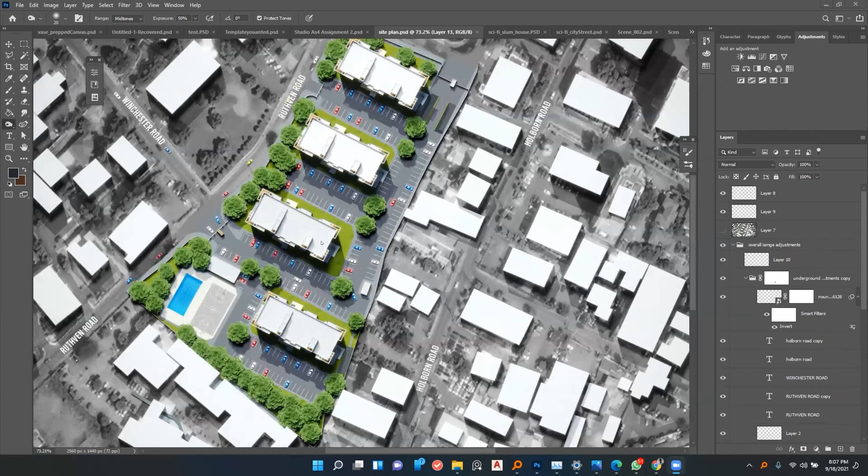From there, everything is rendered and layered on top of one another, so to speak. The main image in color is where I apply all the trees and textures. I'm the type of guy where sometimes I prefer to do certain things in 3D. So for the grass texture, what I could have done is use what is called a mask, which lets me select the areas around the structures and then apply a grass texture.

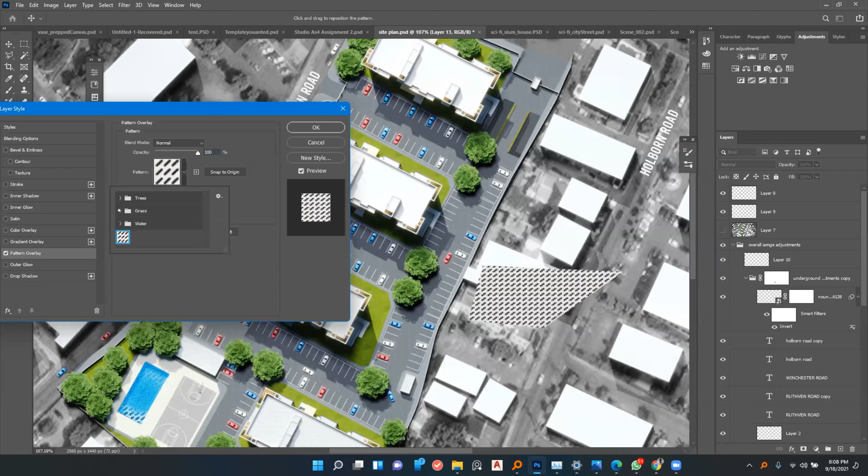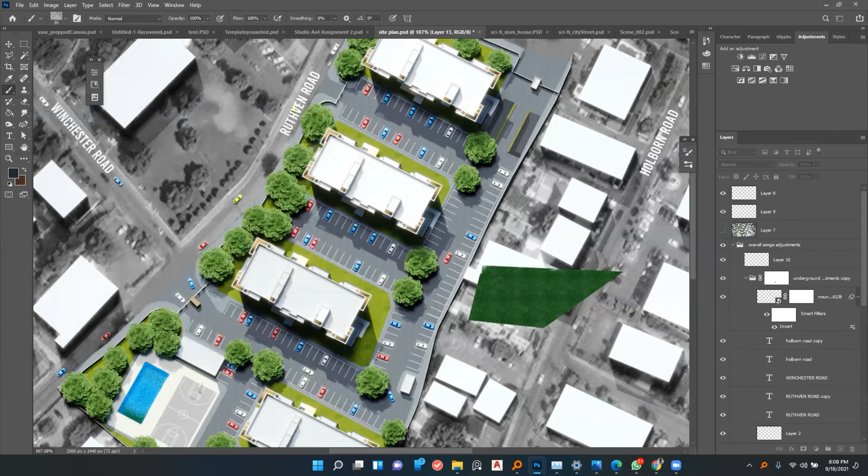To give you a general idea of what that is, I'll give a quick demonstration. This is pretty much just a selection that's then painted in, and then I can apply an effect such as a pattern overlay. I can make custom patterns or use pre-existing ones, and from there scale it similarly to AutoCAD. I can then apply this all over my scene in areas I've selected. It helps save time rather than painting in the grass or erasing around it—you can just have the general shapes drawn out already.

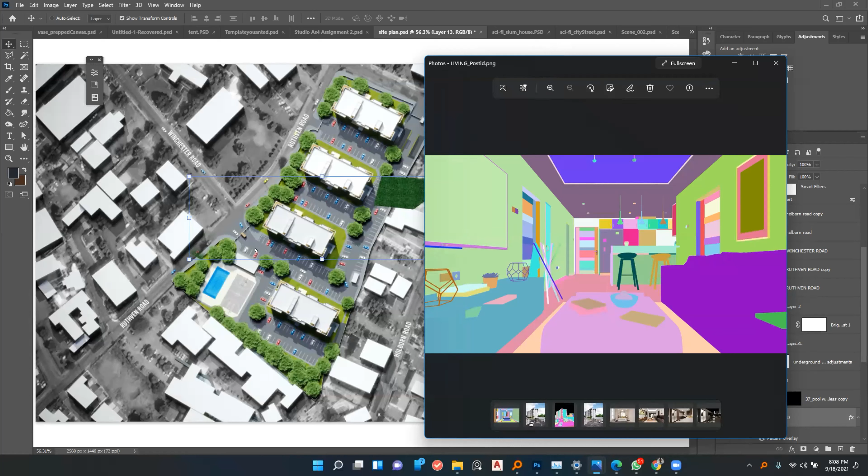Or if you're capable of doing it in the render program, you can render what is called a material ID or material mask. This is an image which is an example of one. What it does is allow you to faster select certain areas of your 3D rendering, which makes the photoshopping happen a little bit easier.

But for this, it's a very simple thing—the general outline exterior is pretty much just placed in black and white, like a Google Map image. I added text here and there, and then it's just general editing from the color balances to the brightness to the hue and saturation—all found under adjustments. So, for example, with brightness and contrast, I want to boost it, make it a little brighter, and maybe more contrasty to punch in some shadows.

The main idea behind this is to get an image that is clear, so people can have a general understanding of what you're trying to convey—where is your structure, what is around it—and you place a lot of importance on just the general site.

Moving on to another example.

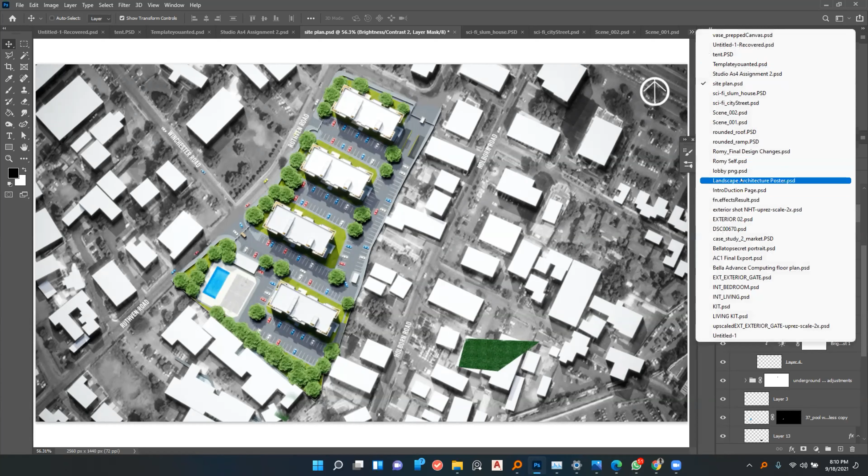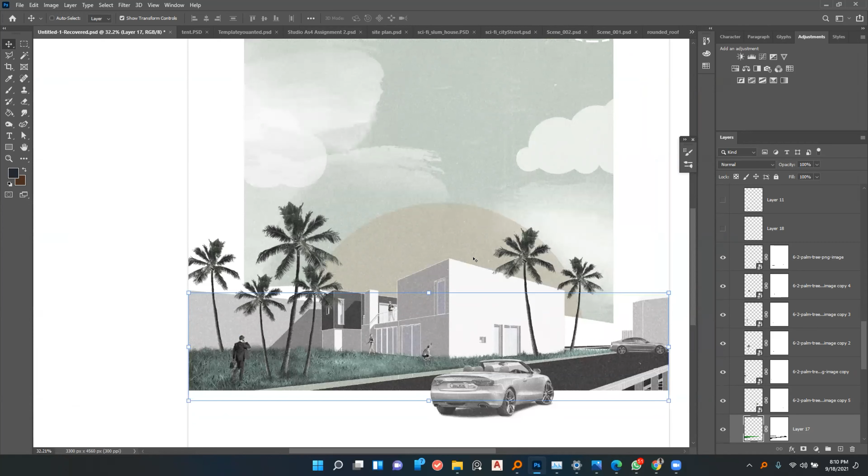The thing about Photoshop is that it can not only do more realistic renditions for architectural visualization, it can also do collages. It's very varied—it can be from hyper-realistic renditions to more collage-based ones, where you take elements from different areas across Google and compile them into a collage to kind of speak or say something about your work.

Let's say, for example, in this one I had just a SketchUp import of this white model. It wasn't really anything too fancy—it was just really and truly a SketchUp import.

And then from there, I overlaid a noise filter and a paper texture. I also imported some line work from SketchUp and inverted those to white to help punch things out a little bit more. Most of these little smudges and marks that you see here are pretty much just a brush that's been applied all over the scene to add a little bit more grit and texture, so it's a little more visually pleasing.

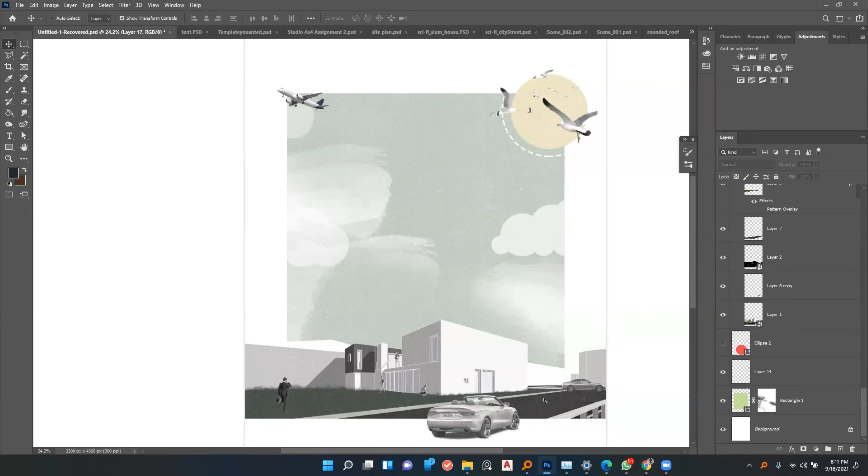From there, subtle things here and there are added in, like I darken the road—I use the PNG of a road and just drop it over to add a little more grit and texture. Then for the grassy areas, I started to copy in a grass image and copy that all over that little patch here.

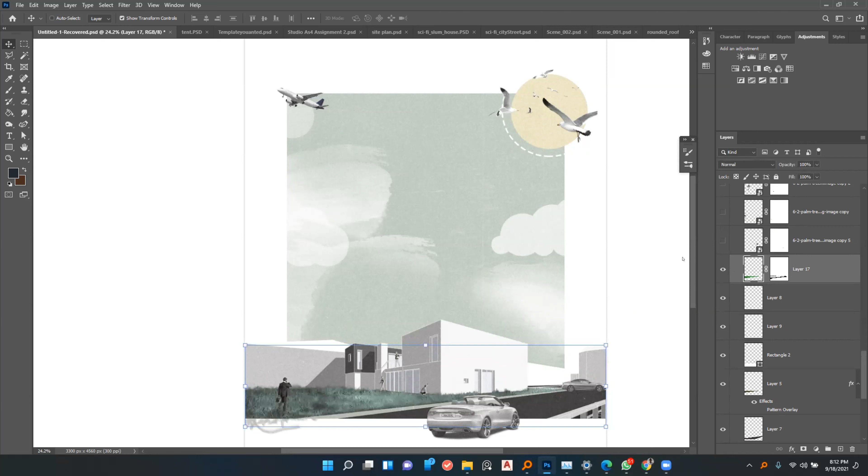And then I use the brush to help fill it out and let it feel a bit more luscious. Then I added trees here and there, and darkened the base of the roots to add that extra shadow, and added a little bit of what I call ambient occlusion, which adds some realism to the scene itself.

From there, it's really just the use of masks here and there to darken certain things and add certain things. I can also use a black soft round brush to add dark areas into the scene, which helps create shadows or make shadows darker, punching things out a bit more. You can either create them on a separate layer and turn down the opacity, or play around with the opacity of the brush itself, and also a little bit with the flow.

Moving into something else that's a little bit more realistic per se, this is another example, an application in a section actually. For this one, it's pretty much more of the same, where it's just adding entourage to give the image human scale and let it feel a little bit lived in, adding context on the exterior, a little pop of color to signify that this doesn't exist in a white void but there is a space behind it. Adding shadows, and a little bit of this bloom effect to let it pop a bit more and let the colors be a little more vibrant, so to speak.

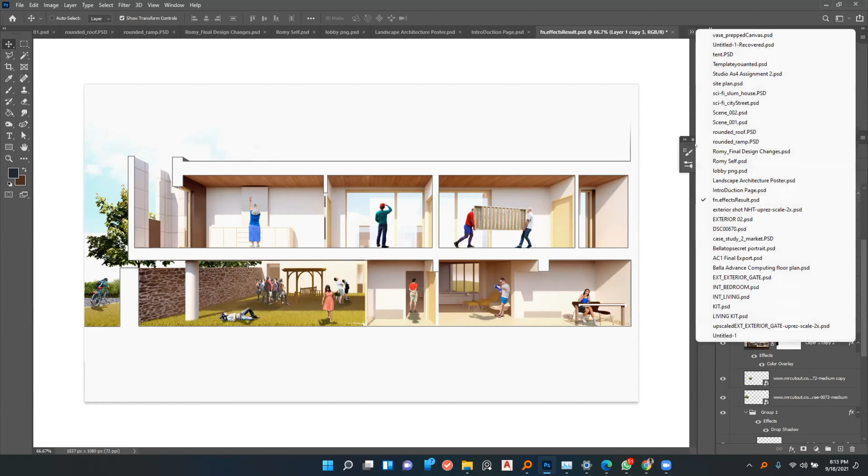I guess another example would be... not this one. Sorry guys, I have quite a few projects open. So yeah, this one is a little bit more heavily rendered in 3D.

But the benefit of this is, well, what I normally do with Photoshop is I always touch up the images no matter what. It's always important that while you go through the processes in 3D to give your images a specific look even before they get to Photoshop, sometimes there are certain elements the program might not render out properly—whether the image is a bit noisy, certain textures didn't come out exactly the way you want, there's a lot of tiling, or you needed entourage, but adding 3D people to the scene would have taken longer to render.

In this instance, however, it's just the image, and what I did to it is mainly just a few little things to pop the image and help you focus on it a little bit more. So what do I mean by that?

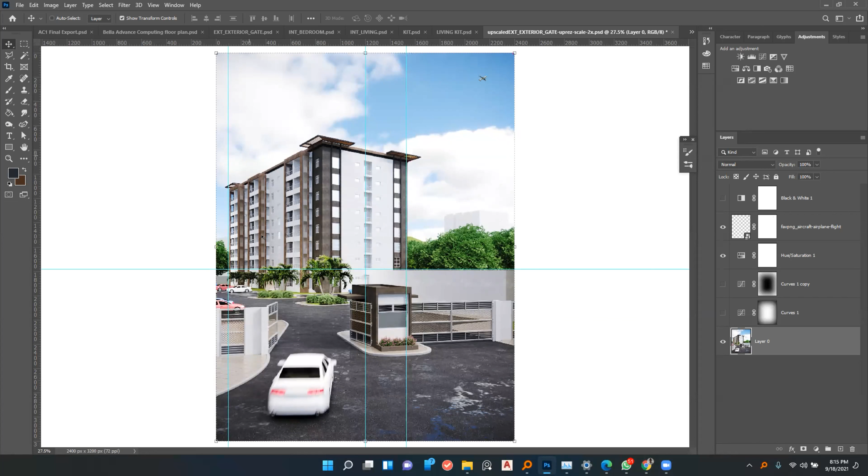Composition is very important when it comes to ArcViz. You want to know what the main target is that your audience is trying to focus on. So I'm using guides right now to give you a general idea of what I was trying to keep in view of the viewer. The main object with the most weight to the left is the building itself. But also, not only do you need something visually heavy, you need a little bit of breathing room around the image. So within the edits, even though they're subtle, I try to add things here and there to help pop that out a bit more.

So over here at this layer, what I've done is pretty much just an adjustment layer, which is a curve. What the curve does is push your highlights—it can push your highlights to be a little brighter, or compress the shadows and let them be a little darker. So in an extreme case like this, you can see the further down I push it, the darker the image gets, and the higher I push it, the lighter the image gets.

But sometimes I don't necessarily want it to affect the image overall, so what I do is add a mask to help keep certain areas in focus. For example, I highlight the specific area, select it, feather the area, and this allows me to pick the location of where I want to be in focus. Then I can add an adjustment layer with that mask already applied, and whatever changes I make usually applies to that area of focus. So that's actually a way you can use to help push your images or add a story to them.

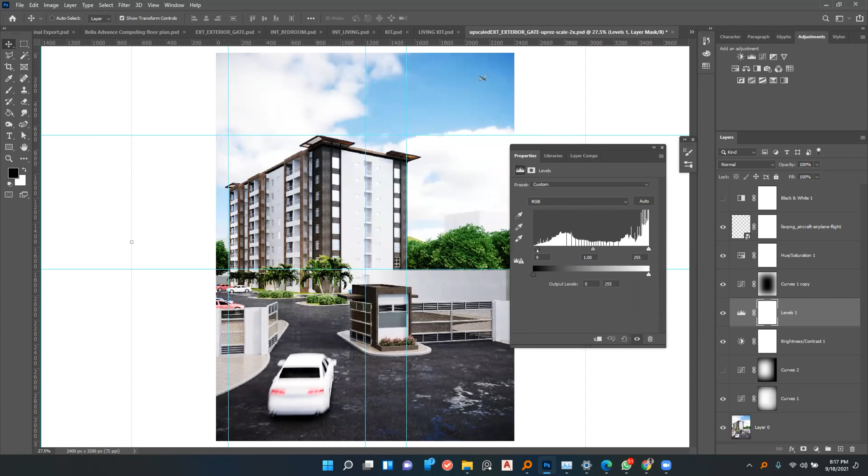Otherwise, it's subtle little changes here and there with the colors. The main things I normally do are edit the brightness and contrast. Sometimes I prefer my shadows to be a little more punchy, so I bump up the contrast, and sometimes I want the image to be a little brighter depending on how dark it came out. Levels is pretty much an adjustment that retains both the highlights and shadows, and it's used to fine tune the image until it gets to that visual perfection, so to speak.

Another example is adding entourage to your renders, which can also significantly impact them. In this instance, the render was mainly just an empty scene, but I thought, I want this to feel like it's been lived in. There were certain areas with the image that I didn't like how they came out. This is another example of the material ID masks I mentioned, which can be rendered out from most 3D render programs, allowing me to use the Magic Wand tool and go in and select certain areas.

By doing that, it allows me to edit specific masks or certain areas within the image, and either brighten or darken objects, because sometimes the render engines don't properly represent the materials the way you want, and you have to go back in and edit it until it looks visually right.

It's also very useful for adding entourage to your scene, because using it can help you cut out certain elements a little easier, since you have an actual selection you can make rather than using the polygonal lasso tool to draw in, which sometimes won't draw the exact way you want or draw straight. So sometimes you have to use the magic wand and the material ID mask to capture what you need and then erase it out of the scene.

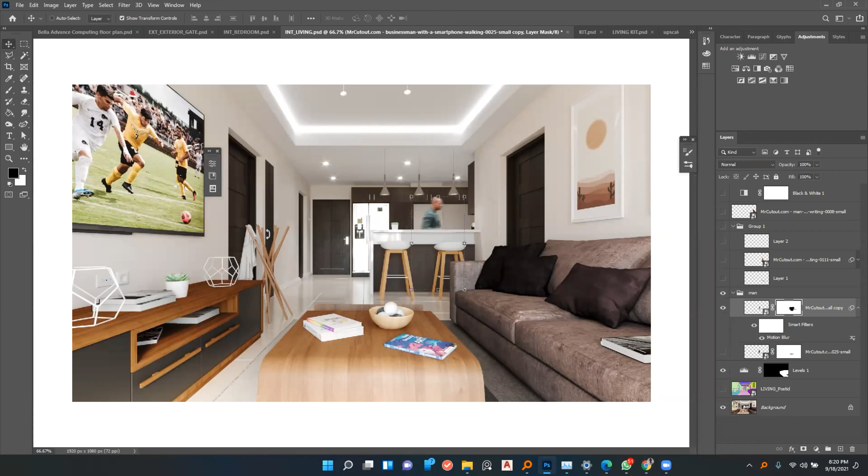Also, using masks, you can apply effects to your renders. Like this example, it was a guy who was just walking, but I wanted to convey motion in the render to capture the eye and say, hey, this is something interesting happening back there. So I added a motion blur filter. What it does is take the pixels and smear or smudge them, and you can choose the direction of the smudge to show the direction the object is moving in. This helps your renders because it adds a little movement and vibrancy.

Also, you can add in people, using a mask to help cut out certain parts of the entourage to allow them to integrate into the scenes a little better. You can also use the paintbrush tool to add highlights, or another feature I recently discovered, burn and dodge, which are tools similar to adding highlights and shadows. The burn tool darkens a particular area, and the dodge tool brightens a particular area, so it acts similarly to adjustment layers, except it's tied more to a brush, so you can choose specific areas to add highlights to and specific areas to darken a little more.

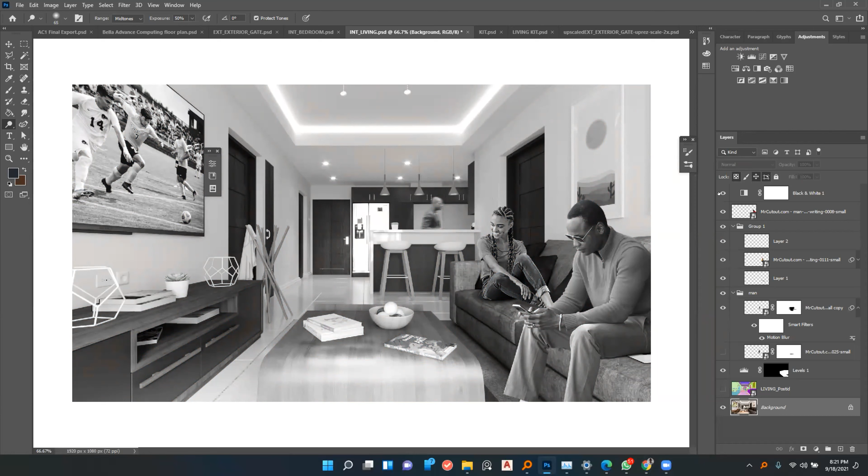Occasionally, a thing I like to do with renders to check if they feel more realistic, or if I'm unsure about certain aspects of the image, is apply a black and white filter, because if the image works in black and white, it will work in color as well. It's a thing I like to do, it works for me, and it helps me see any mistakes I might want to fix, like a little white on the cutout, and sometimes I might want to edit the material so the values appear either darker or lighter.

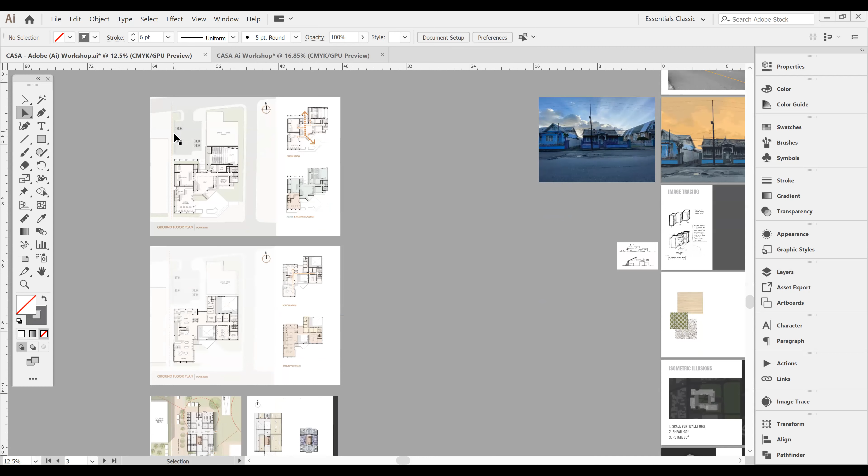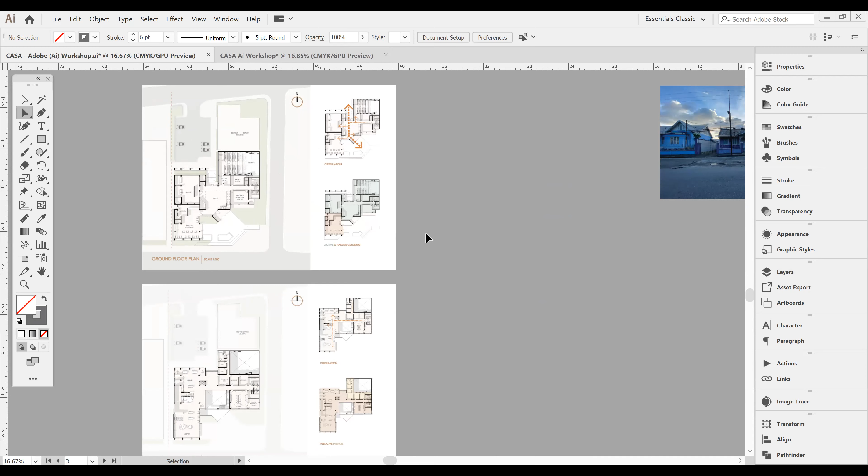Just an example, I use it with floor plans, getting them to the look that I want. Normally I export my plans from Revit, already preset with the shadows and the floor color that I would want. Once I carry it into Illustrator, I edit it further, probably put in some context, label, north arrow. And if I'm doing analytical diagrams, I'll put in those lines or blotches of color over the space and lower opacity to make it see through.

These are just some plans that were done in my 4th year. By the way, I am also a recent-ish graduate of CASA, currently also in the architecture work field and also doing my master's at the moment, also at CASA.

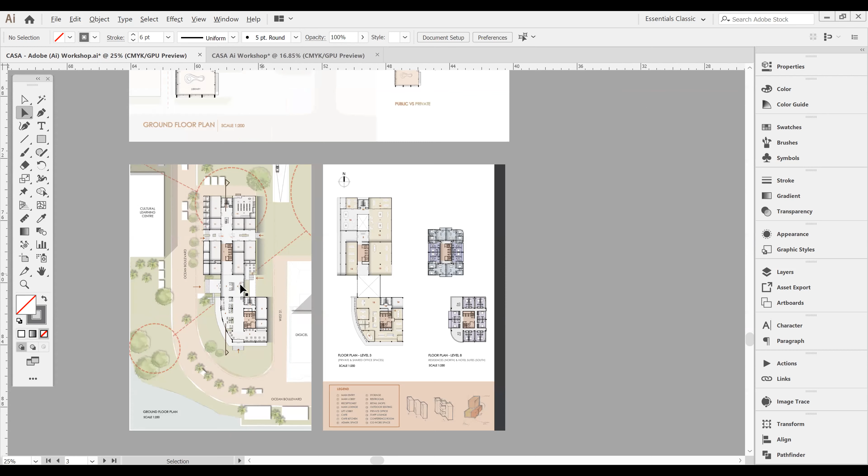So floor plans with Illustrator, I find it to be very quick and easy. Once you have that set workflow, whether you work in Revit, ArchiCAD, wherever you do your base drawings, even if it's AutoCAD, it's easy to just get those PDFs over and drop them and start working.

So Illustrator, the basics. In this image here, it was a conceptual abstract photo montage that was done for one of my master's projects. What was very significant here was the simple use of the lines.

Over here, you have your pen tool or your line segment tool. Your pen tool really works similar to any pen tool, you just draw whatever shape or line you want. If you're tracing over something or just drawing a line anywhere, you use that. So I would start here, draw a simple line, and this line already had a stroke on it, but let's say I want to make that stroke, the line thickness, greater. I just have to up the stroke here, and you can see the point changing, and lower it the same way.

Now, if I go to the stroke panel, there are more options for manipulating a line. For instance, if I want to make it a dash line, just tick the dash line option, and you can change the size of the dashes. Right now it's 12, I can change it to 6 if I want it smaller, or 20 if I want it bigger. You can also change the spacing between those lines, so it's great for getting simple diagrammatic lines.

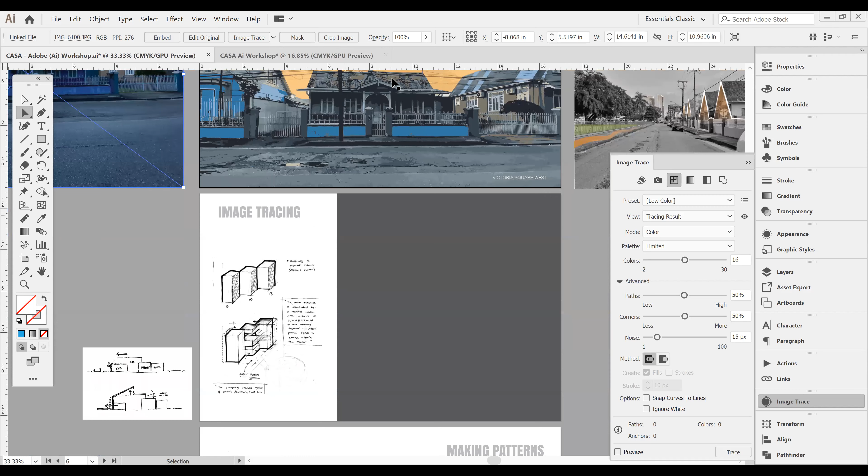Now, another really effective way of using image trace - I know sometimes we do some really cool sketches in our sketchbook, and now with all these online presentations, we're like, geez, I'm only gonna get my sketch under sheets, but it's also looking rough. I don't want to see the book in the background, I don't want to see my page.

So here I have a scan I did of one of my pages of my sketchbook, a very random sketch, just here for the example. But as you can see, it was from my book - you can see some background noise and stuff you don't really want to see when you carry the sketch to your sheet itself, like my text, my words, all that stuff. But let's say I want to have this image on my sheet.

So I'd click the image, also using the same image trace, but I want it to stay black and white, just because it's already a black and white sketch. I just want to get the lines out. So I would choose black and white, which is this one here.

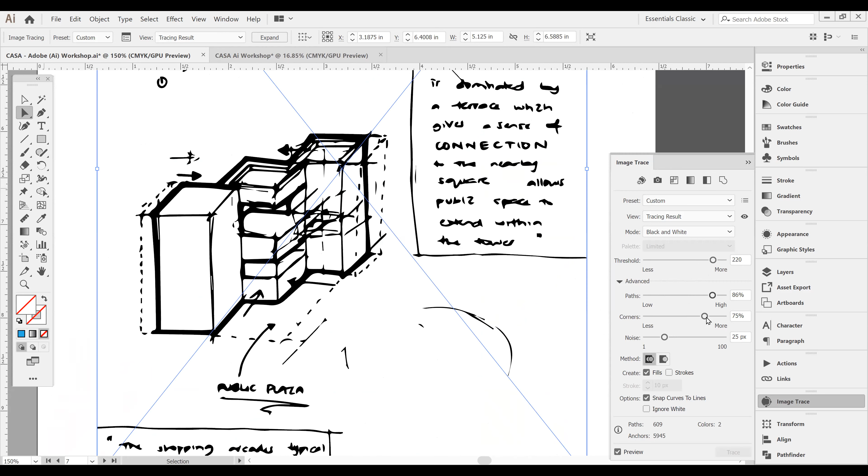And what it has done is actually turned the image into a line drawing. As you can see, it's kind of choppy looking right now, but with these tabs here, you're able to actually edit it and allow it to show more detail or less detail if you want - make it cleaner, make it more abstract if that's what you're looking to do. Basically you can edit it to get it how you want it on your sheets. So let's say this is the detail I want it to be in.

But the next thing is that my sheets are not white, my sheets are gray. How am I gonna get this? So this is how it looks right now on my gray sheet, but I don't want to be seeing that white background on my sketch - that's not cute on my gray sheet. So what am I gonna do now to get this sketch alone on my gray sheets?

Now with image trace, you can actually expand it, which allows you to see these lines and see this sketch as just paths. So you can zoom right in - that path is a clean line, no lie, no pixels, no nothing. So they have basically converted your sketch to a shape, literally. But I still have my background.

So how am I gonna get rid of that white background from my gray sheet? Well, what I would do is go into that, and you're actually able to select each shape, each color, each piece of that sheet or drawing. And because I want all the white to go away, I select one part of the white, and once I select the same appearance, it's gonna select everything that is white on the sheet. Hope I'm not going too fast.

But once I select all the white and then delete the white, all I'm left with is the content of the sheet. And now you're seeing that I have my sketch from my book, same as before, but now it's just on my gray sheet background, which I wanted.

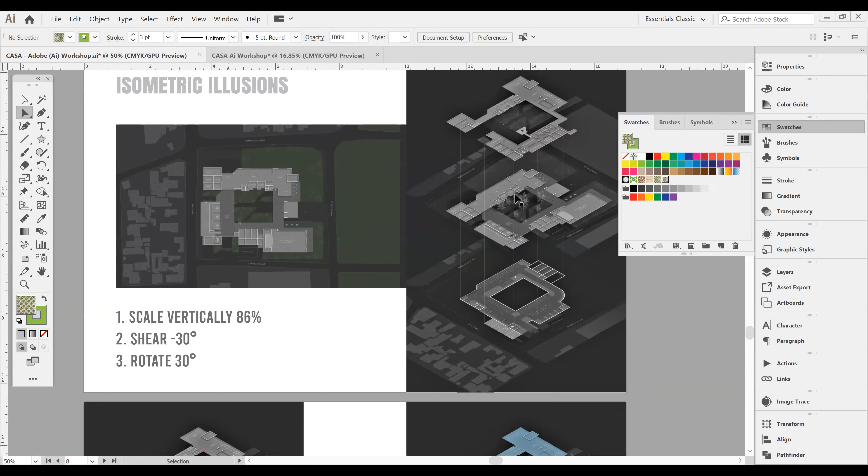So this was actually the ground floor plan before, and this is it here now, but just in black and white. So how did I get it to turn, or give the illusion of being an isometric view? Well, first, I have three steps here. You select the image that you want to create that illusion with, the plan.

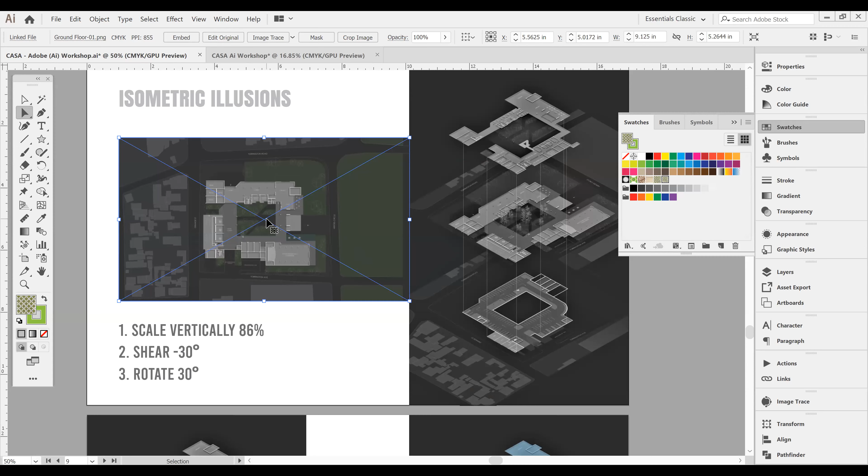Then this first step is to scale it vertically by 86%. So in Transform, you go to Scale, and because it's just the vertical plane you're scaling, you change just the vertical to - oops, I had this on 50 from the last thing, let me change it to 100 first. Right, so you change the vertical to 86.

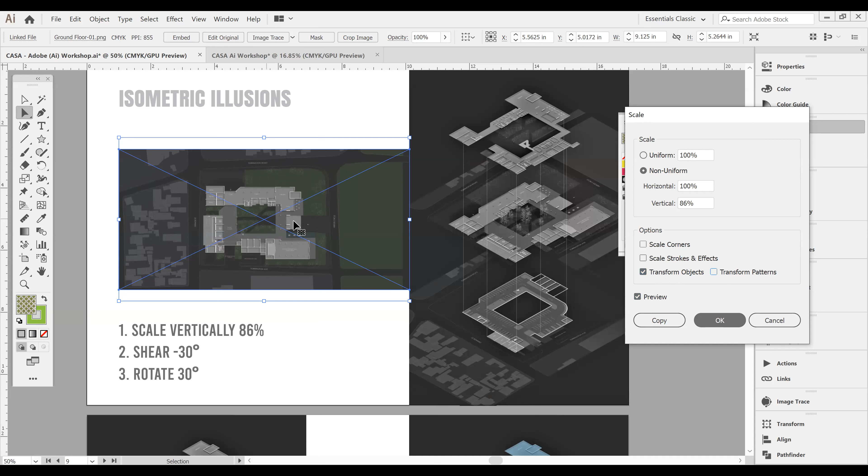And it's actually previewed, so you can see that it happened already. Oh, sorry, I didn't have Objects checked - I checked it off last time. Make sure you have Objects checked, right. Okay, so now you can see the image looks kind of skewed, kind of squished, weird looking.

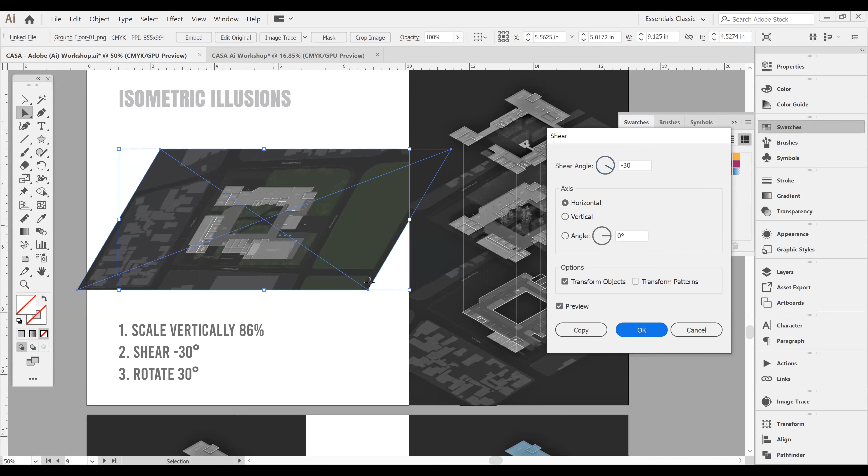Now the next step is to Transform again, go to Shear. Because of the orientation I wanted, I would do it at negative 30 degrees - but if I wanted it to turn the other way, it would be positive 30 degrees. So it's on positive 30 now, so I'm going to type negative 30. Right, so we can see it's doing something. Still looks weird, but just trust the process, y'all. So the last step is to rotate it by 30 degrees.

It's on negative 30 now, so I'm going to change that to 30. And just like that, it's now an isometric looking floor plan.

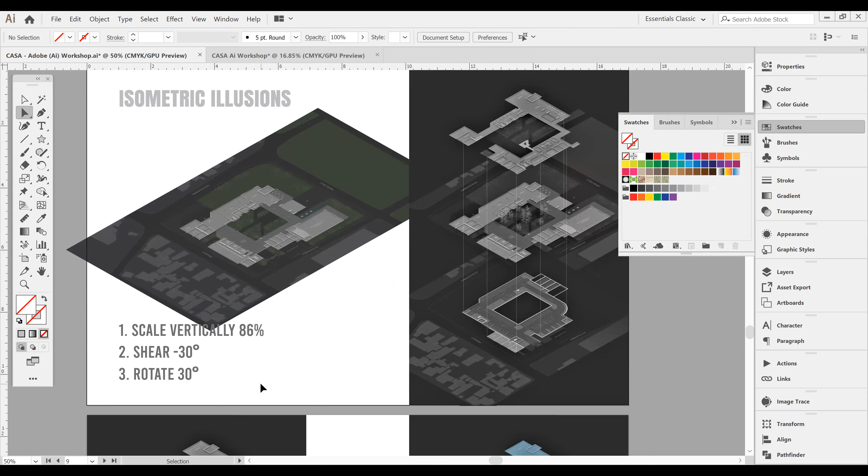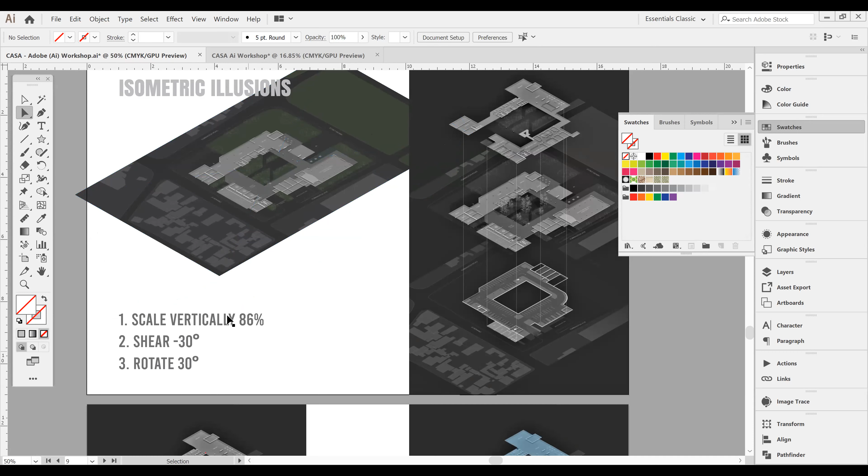It really helps, especially for doing quick diagrams or representing how the spaces are stacked, as a simple way of getting your plans to appear this way, even though it's not a literal isometric drawing with 30-30 angles and whatever. So that's just an easy tip. If you can remember this, or if you want me to share it or screenshot it, once you do these 3 steps, you can get it like that.

These were just some of the ways that I continued to develop this isometric illusion floor plan explosion, to show, for instance, where natural cooling and passive and active cooling happens in the building.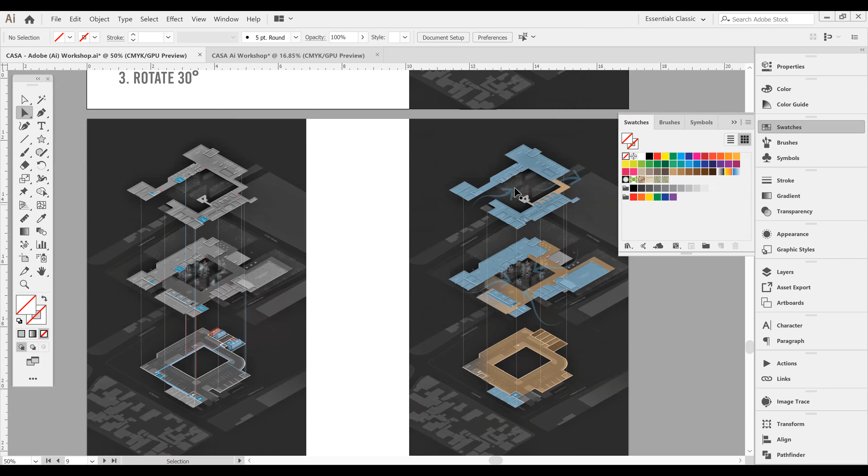Also, these arrows are made the same way I showed you earlier, with the line tool and putting an arrow on them, and there are line editing options to make the ends taper like this if you want.

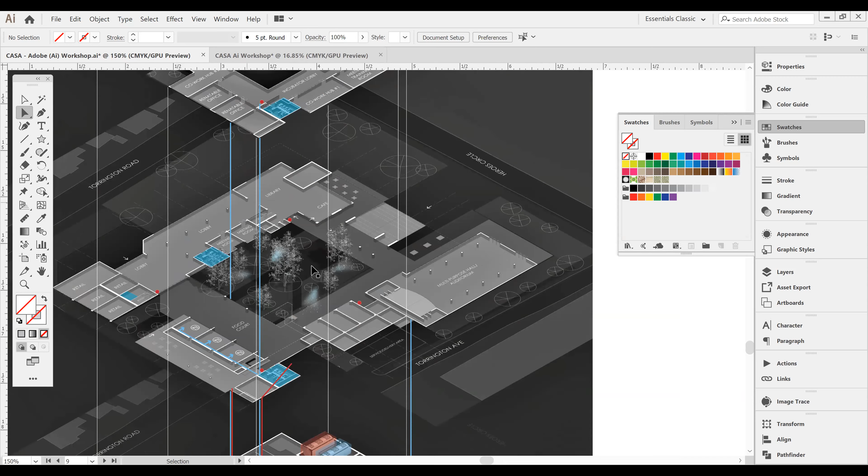Also over here, showing where the bathrooms were, or wherever uses water systems, showing those water systems from the water tanks below. Honestly, these images of the water tank were just me typing 'isometric water tank' into Google, and I got a PNG. I was able to drop it in and it looks literally like it goes perfectly with the angle of the image.

So it's really beneficial to just know how to get that isometric illusion for your plans.

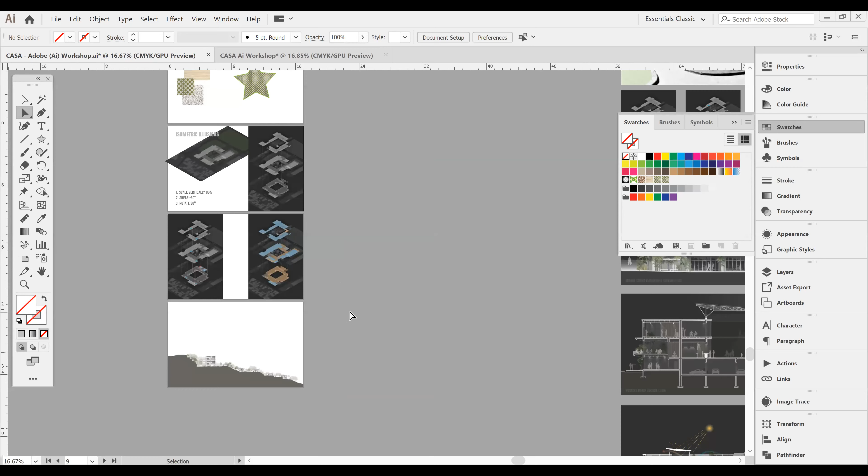Just more of that presentation, because everything you're seeing here was done in Illustrator from base images. This was just an image of my actual physical model. With the pen tool, I was able to trace out the different sections of my model and put a color over them, lower the opacity, and boom, that's you ready to go just like that.

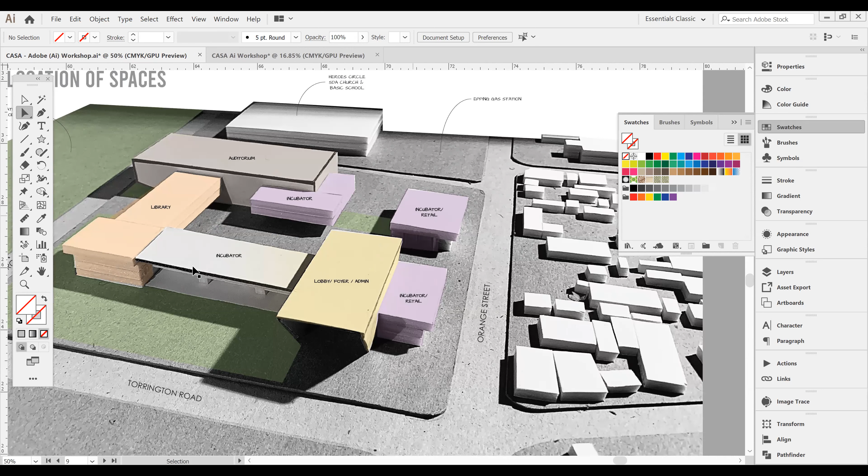Also putting on the text and so on was done in Illustrator, and it was actually clipping masked, as I mentioned before. My house was in the background of the image and I didn't want that to show for the presentation, so I clipping masked around it to get that out, put on my white background, my white sheet, and good to go.

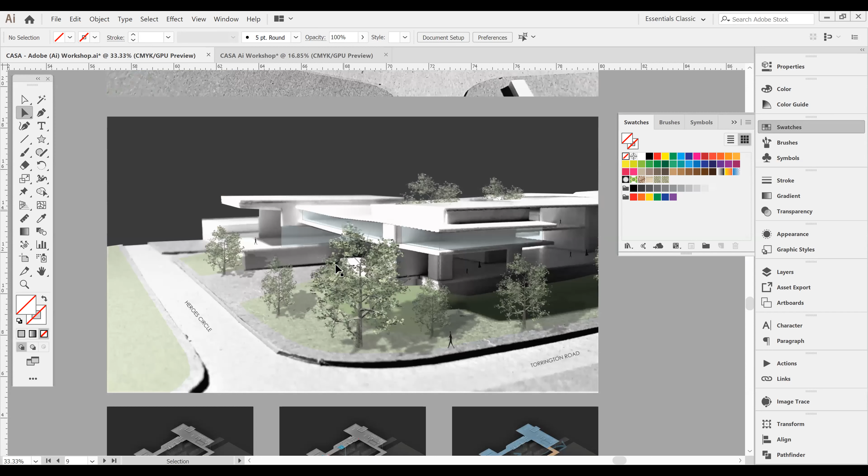Same here with this model image. It was the early conceptual model representation. I did some shapes here to represent something that could look like glass conceptually, as well as some isometric trees, which were also found on Google, to enhance the image and give an idea of what's supposed to be happening.

Although this wasn't the actual landscaping done for the project at its later stages, it was just to give an idea that there's going to be vegetation outside. You can get a peep of vegetation inside as well, and you can see some very tiny people if you look closely, just kind of moving around. They're a more abstract entourage, but it gave a whole feel of what the project was going to be later down once it was developed.

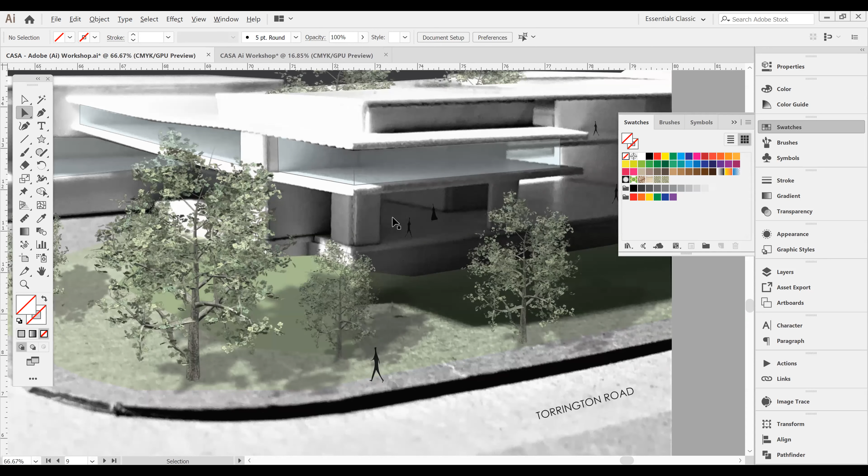You all saw this already with the isometric illusion. And lastly, the last few things here, was an elevation that was done.

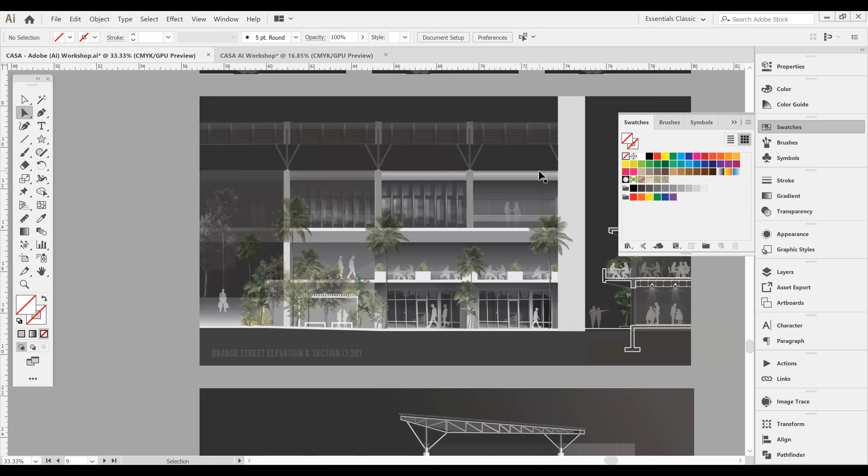Just a mix of drawing. It was done on the actual Revit PDF, so a very black and white basic drawing, and with some shapes, making sure I have my layers in the right order on the side over here.

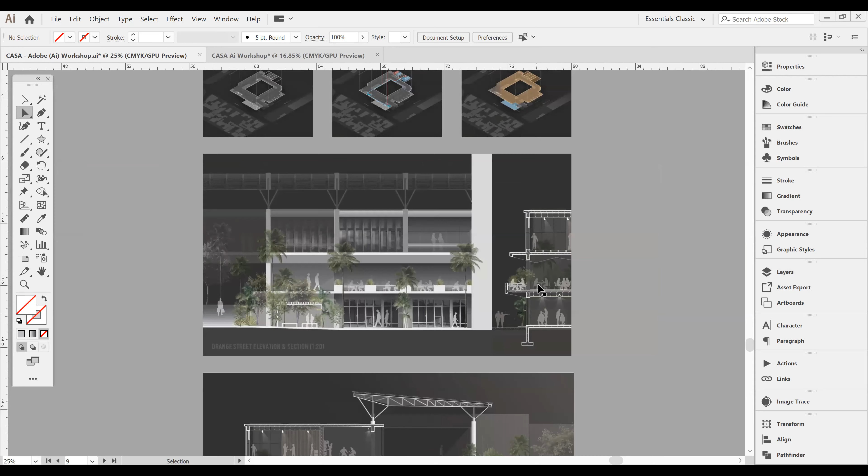There are no layers in this particular file, but once I have my trees on a layer, for example, and my ceilings in the foreground, my entourage on its own layer as well, it really becomes helpful in organizing the drawing and knowing what's in front of what, as well as labeling it to follow what's in each layer. And this is an elevation.

This is the section of that elevation, so the facade you're seeing is right along here. These people dining here are the same persons you're seeing dining along this elevation here. And then this is a section, the bigger section of that whole part of the building.

So you're just seeing how the lines came in handy. I'm able to make my line weight thicker by just increasing stroke, 2 clicks.

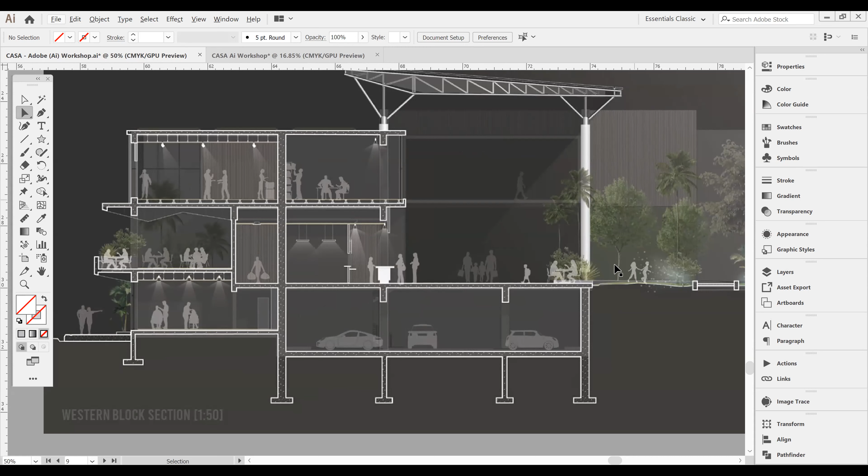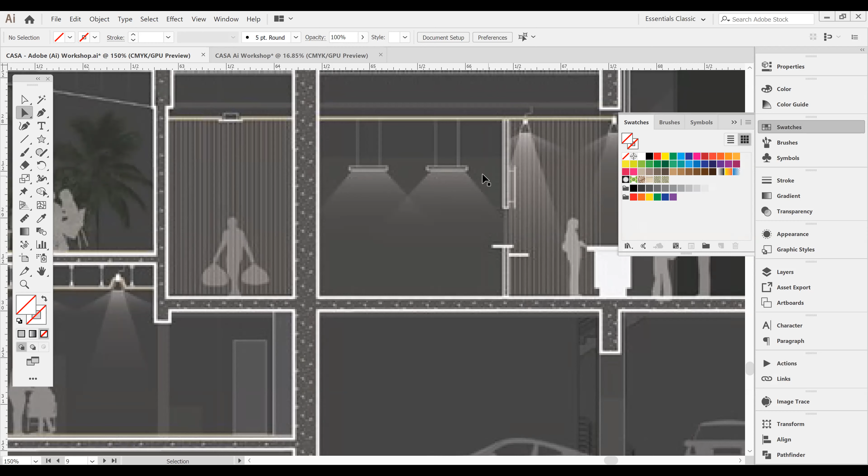Put in some trees. Also, you can put fills in. The swatches allow you to access different kinds of fills, so not just the colors you're seeing right here, but if you go through this entire library, you find patterns, graphical things, things that look like concrete, different line textures—all the things to make the image what you want it to be.

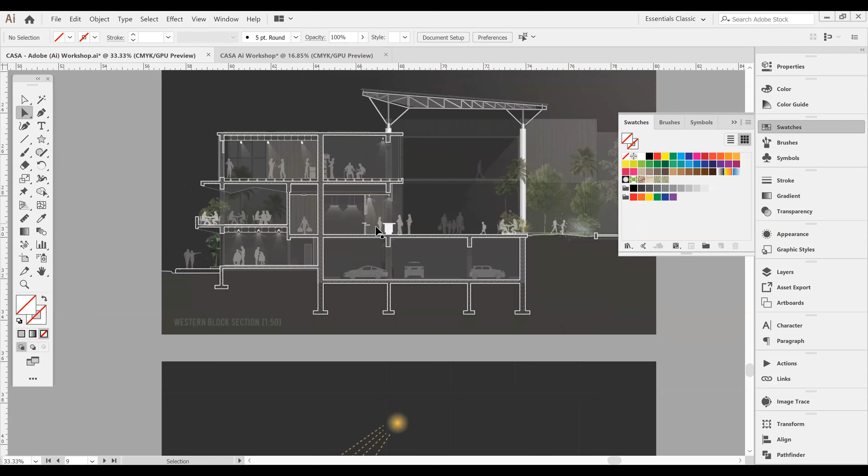And these lighting effects here were just done by drawing a shape and dropping a gradient on it. Of course, with more time, I could get into more detail, but that's just the basics of what you can do with Illustrator. And then here again, a bigger section before it was detailed like above, but just showing what was happening in the spaces.

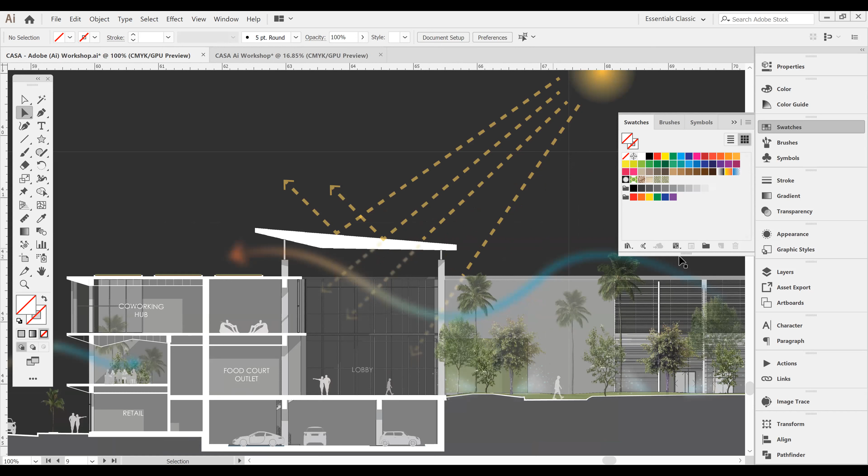You see the streets, the walls, the sun, the lines—all of these are Illustrator lines. Even this arrow here was the same thing I did below, but I just put a blur effect on the line to make it look more soft, like actual wind flow or airflow would be in the space.

Yeah, that's it for the presentation. That's my top 5 tips on what Illustrator can do for you as an architecture student. So thanks, guys.

What's that for the chat? Yes, I have one question. Can you go back to the sections, the ones that you showed us in your example project? Yeah. Did you change the background and the white lines for the section drawing in Illustrator as well?

The black lines—okay, so because I use Revit, I export my things as a PDF. So when I bring it in, it already doesn't have the white background that Revit would have on it; it just brings in the lines typically. But also, what I did to cheat code for this project is I actually put a black image in my actual Revit file. So that was already in the file before I printed it out, so I didn't have to worry about getting my black background in afterwards.

So, cheat code as well, guys: if you want to get a background in from your drawing program, just get a black box, draw it somewhere, export it as a picture or PDF, and you can put it at the back of that Revit drawing, whichever view it is—now you have that background on. Once you export your drawing, it's already done for you; you don't have to get into Photoshop or Illustrator for that background. Of course it gets trickier depending on the view type and view style, and how you manipulate that view in Revit. If you use Revit, or I'm pretty sure it works similarly in ArchiCAD as well.

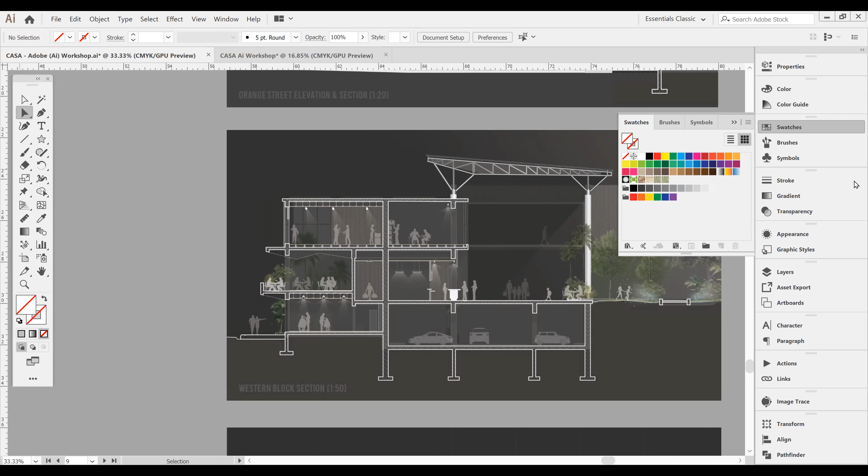And yes, Hayden, you can also just adjust your graphic settings to manipulate the drawing in Revit as well. As I mentioned before, for these plans over here, the floor tone, the shadows, and even the wall fills were already done from Revit. So once I brought it in, I just did my site and some context in Illustrator to add to it. That's just my personal workflow, but I find it helps—the more you can do from your drawing program, if that's your vibe, the more it helps once you get to the presentation stage of your drawings.

Any more questions? Hey, Ranike.

Those are some excellent tips. Excellent presentation—I'm sure it has motivated a lot of people to at least try out Illustrator a bit. Yes, it should be the architecture student's best friend, probably even more than Photoshop, because of the lines, right? Yeah.

As you are in the master's course, I don't know if anybody here is in the master's course, but usually at that level, everything is bigger. Buildings are bigger, there are more lines, there are just more resources required, especially for how your presentation is being done.

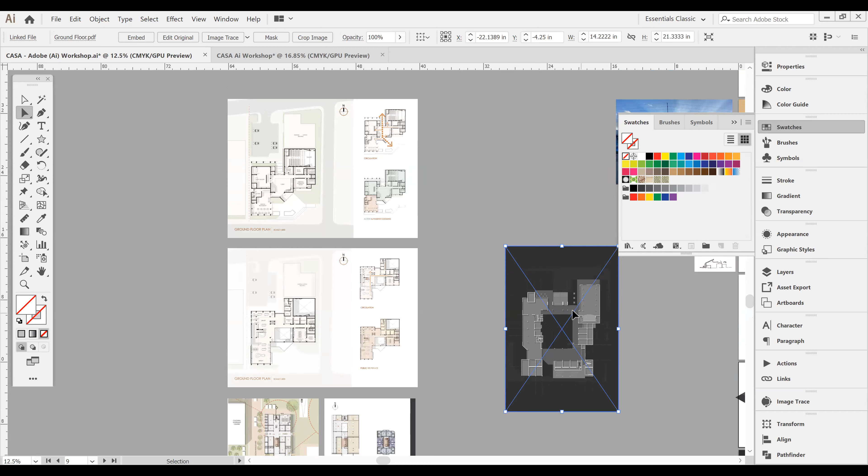Okay, so this is just an example. I dragged in this floor plan, which was already done like this from Revit, because I manipulated the program to get certain settings on it. Typically if I left it regular it would come in as a PDF, but as I said, I had the black background on it, so you're seeing that from the PDF. If you look up here, you'll see it's a linked file, which means that even if I keep changing it in Revit and re-export as a PDF and save over that file, it will automatically update itself in my program.

What that does is the file itself isn't carrying the weight of that particular PDF link you have in. So in terms of saving a computer from the stress of running the program, that's a tip to keep the file small, and once you know where your links are on your computer, you can always find them and update them. That's one way in particular.

Also, Illustrator has compression qualities as well. So when you're saving the file, I have to do a save as, sorry guys. When you're saving the file, there's a checkbox here for use compression that also helps keep the file as low as possible, as well as if I'm exporting or saving it as a PDF, for example.

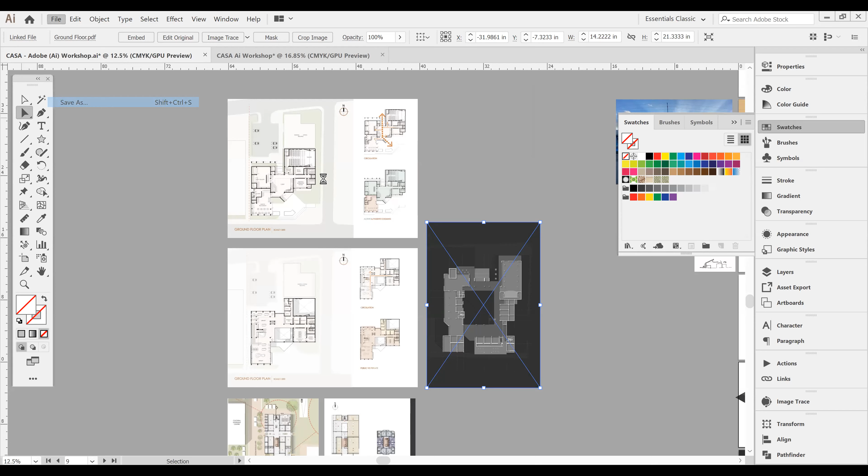It gives the option of—are you guys seeing this pop-up menu? Yes, right, so in compression you can really adjust the kind of quality or the file size you're aiming for, or get it as low as you can if it's a struggle to save or open it. I don't really dabble with it too much, I normally just keep the file big, but if your computer is struggling, that's a way I know of getting it down when you want to save it, for instance, to a PDF, or compress the file a bit.

Yeah, that would be my two tips in terms of your question.